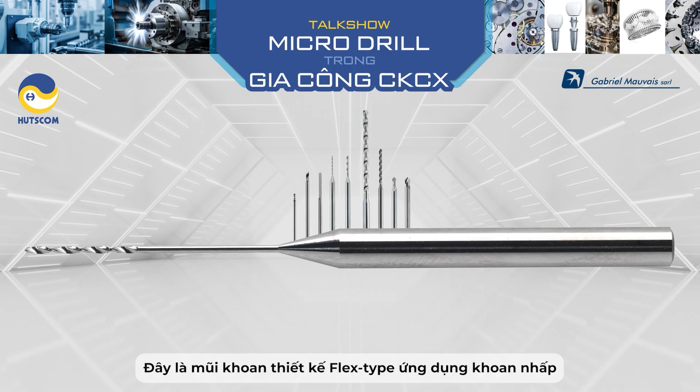So the products are very small. Like this is a drill for flex type drilling with pecking cycle. Flex is like one flute. This is two flutes - but of course we can do one flute, two flutes, three flutes. We can also do step drills and coolant flow drills.

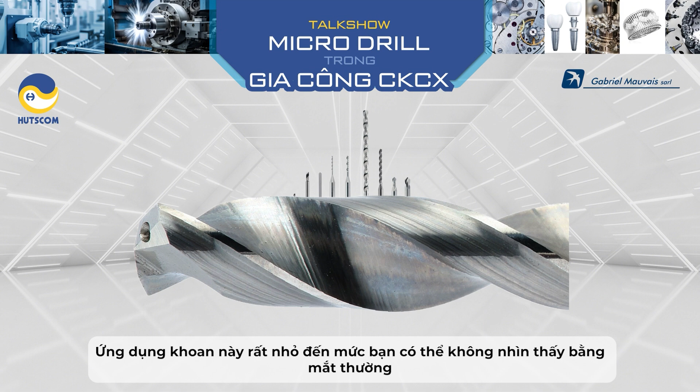So this one, for example, the application is very small - you can barely see it with the eyes - this is for eye surgeon applications. We manufacture 1,000 drills per year, so about 100 every month, and this is for an American customer. We deliver a lot in Switzerland, USA, India, Asia, Thailand, Korea, Malaysia, in the medical industry.

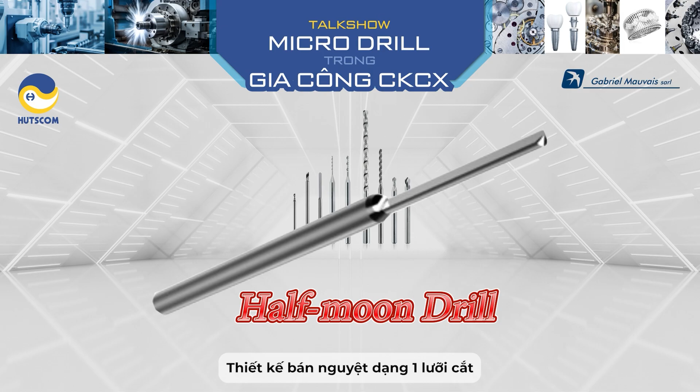And another thing - for example, for connector applications, we manufacture a lot of gun drills, so half-moon drills, which are single flute. We do a lot of them. It removes the chip lock faster, right? That's right, for soft material like brass and copper.

Coming back - you told me you have special tools and general tools. We have two types, general and special. Special means design based on customer demands. What's the percentage between general and special tool right now? 50%, really? 50-50. 50% of the volume is for standard series, and 50% is for specials.

So in total, we make 300,000 drills per year. And the capacity - every year we increase capacity with one more machine, so now my capacity can double. This is why the Vietnam market is important for me in my strategy, to increase the capacity.

But when you make a special tool based on customer demand, how fast do you do it? We receive the drawing and then deliver to the customer. Because this is a small company with easy, quick decision-making, we do our best to have a short lead time.

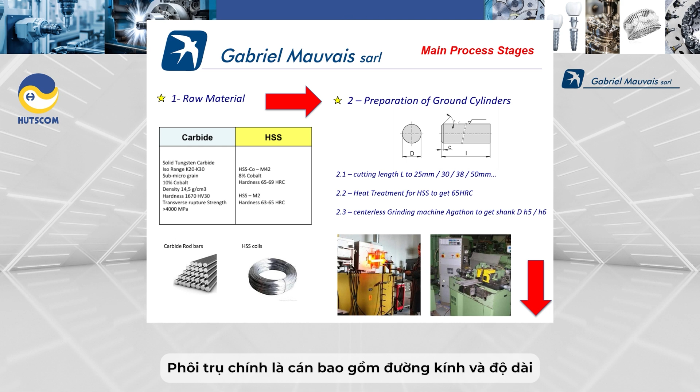The first stage is the preparation of the cylinders. The cylinders are the shank, with the diameter of the shank and the length. This is a special process with cutting, grinding, centerless grinding. That's the first step. Then the second stage is the manufacturing of the drill itself.

In this stage, there are 3 types of operation. This is a general explanation - of course for specials there are many different ways, but globally there are 3 different stages.

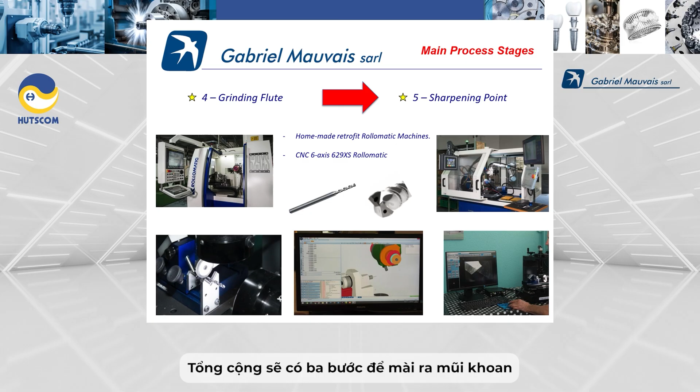First, the grinding of the diameter, which we make on special grinding machines with 0.001 tolerance, so 1 micron of tolerance of the OD. Then we go for the flute grinding on special machines. Then the final stage is the sharpening of the point. So there are 3 steps, but some of them, for the fluting and the sharpening, we can make together on a special CNC grinding machine, 6-axis.

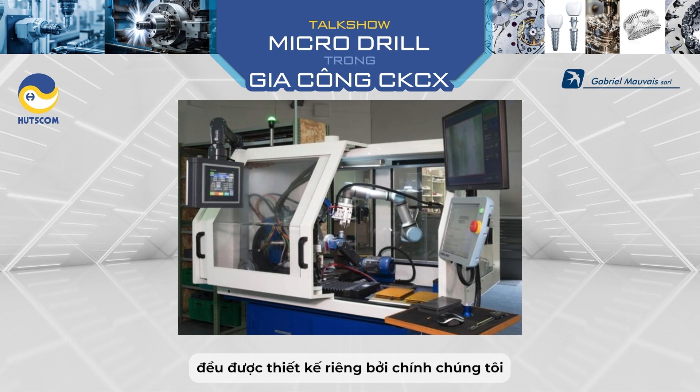All those machines are either our own design or from constructor machines like Rollomatic machines. They are very precise machines with consistency, nearly 2 microns of capability. This is to guarantee the final quality of the drill.

You mean you apply this to all types of drills - 1 flute, 3 flute, and single flute? That's right. And loading is by automation - automatic loading and automatic unloading too.

And running machines from Switzerland? Yes, our machines are Rollomatic based. We have new machines, and also an old generation of Rollomatic machines that we completely disassemble and rebuild ourselves with new systems, more precise.

But how do you control the precision of the drill to 2 microns? How to control? We have special equipment for that. But of course, first is the confidence with the setting of the machine.

If the setting is good, the quality is good. First, the setting of the machine must be perfectly done. Then, of course, the capability of the machine - it must be well maintained, perfectly aligned, no gap in the sliding system, to make sure the machine is capable of holding the tight tolerance. So good setting, good machine, and then the controlling is just a piece of cake. Controlling with systems like special video control or laser system control.

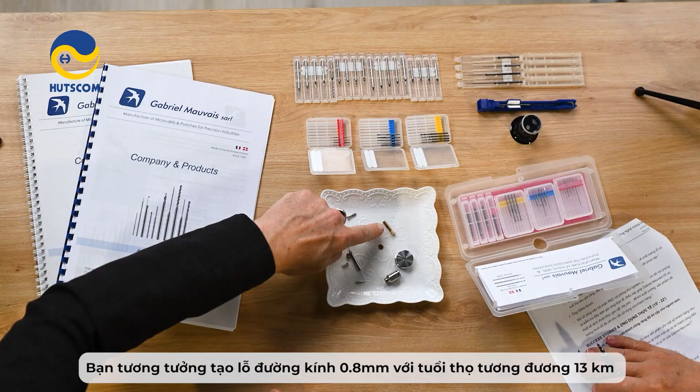This one is a 0.8 millimeter diameter drill. Imagine a hole of 0.8 repeated through 13 kilometers, with no coating - just carbide. For coating applications, some materials like stainless steel require coating added to the drill to achieve better tool life. For coating, we have a facility just 30 kilometers from our own factory, so it's very easy and quick to send the drills uncoated and get them back coated.

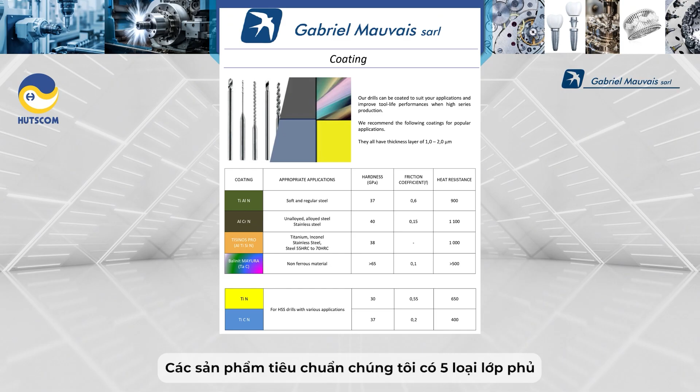In our standard offers, we propose 5 different coatings adapted to different applications. For ball pen tips, we have 0.5, 0.7, 0.8, and 1 point, and 1.1, 1.2, 1.3, 1.4 - we have a long range for ball pens.

In Vietnam, we have one famous company, Thiên Long. Yeah, I know you know him. He uses for ball pen tip a 0.5 method. Only 0.5 - very thin, very small and special. In the future, I wish to launch this product to Thiên Long. So now, as you told, every pen tip must have a drill.

Another thing we can show is the technology and technical features of the drill - single flute, two flute, and three flute - and the advantages and disadvantages of each when used. In my standard catalog, I have a document explaining the different advantages and disadvantages depending on the application. The single flute is good for brass or copper, the two flute is general for many applications, and the three flute is good for reaming - because the core of the three flute is very strong.

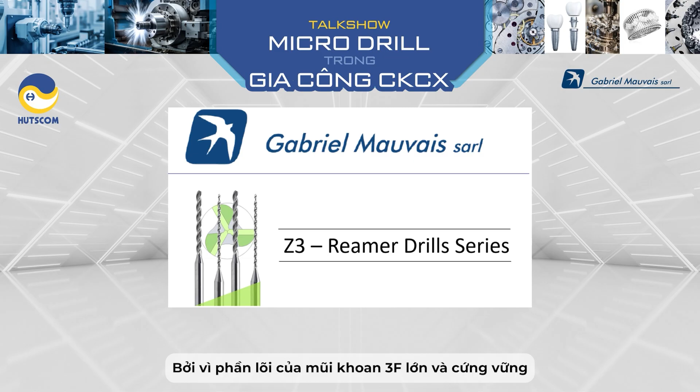Because of the three flute design, there are three guiding surfaces during the drilling process. Because of the tight tolerance, the three flute drill can be used for single drilling and reaming applications. So for deep holes with straightness expectations from the customer, the three flute could be a good alternative for stainless steel, titanium, and tough steel.

We have a service for resharpening and recoating. For bigger tools, bigger drills, yes, we can resharpen and recoat, but for small sizes, it's not practiced and it's not advised, because when the drill is used, the flute is often burnt by the chip evacuation. So the polishing of the flute is destroyed, and it's better not to.